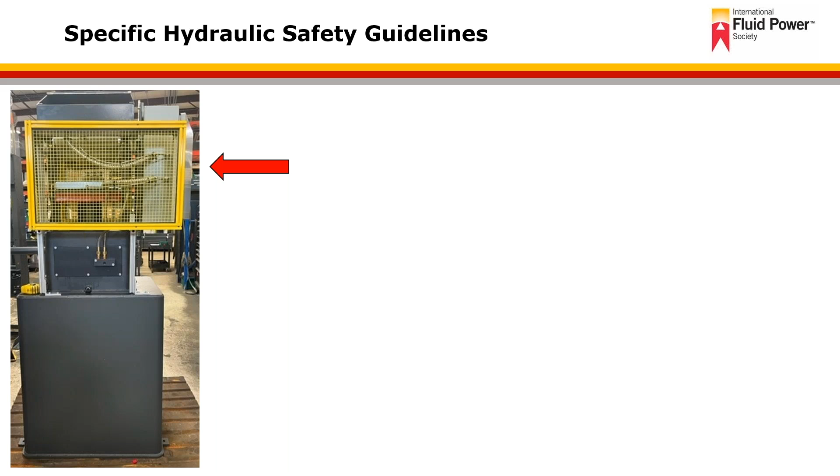These could include, but are not limited to, a foot pedal switch, which indicates that an operator has to be in position in order to operate the machine, or an operator presence switch that could be integrated into a seat. This could be on lots of pieces of mobile equipment, and you may even see a very simple form of this in an application such as a lawnmower.

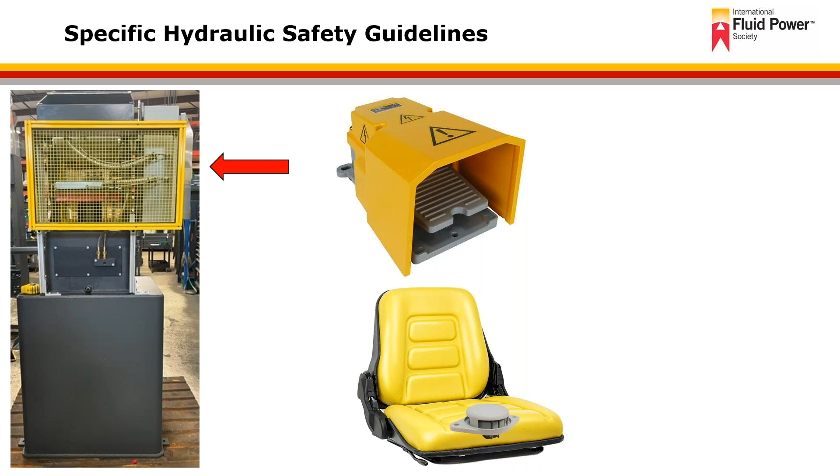This can also be a dual hand operation device, so you wouldn't want to disable one of these. The importance here is that this may be used in a press application where you have to have one hand in place on one control and the other hand used to operate a second control, which ensures that the operator has his or her hands free of any potential pinch points within a press operation.

This could also include a position switch or a pressure limit switch utilized within the system. You want to make sure that none of these safety devices intended for safe operation are overridden, as that can result in unsafe operation or potentially unintended movement of a machine or actuator. Those safety devices are in place for a purpose. You want to make sure they are not overridden, bypassed, or removed.

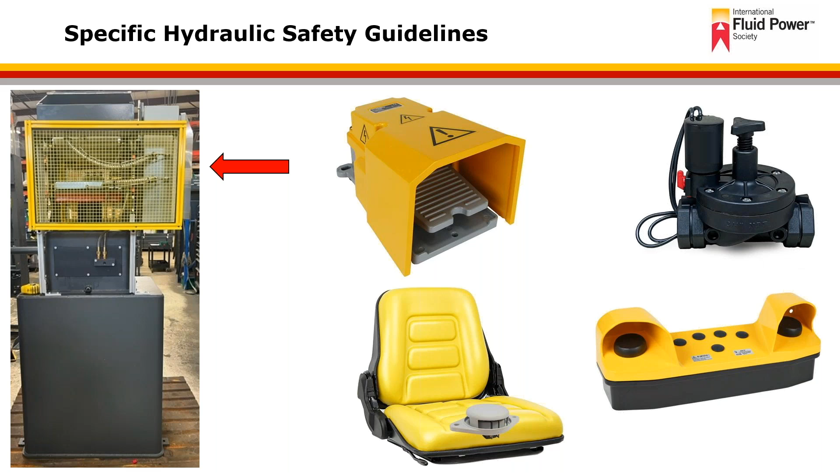Another important safety guideline with respect to startup and operation is that you should monitor gauges at startup and during operation to see if they are not reading the normal values. It's important to know what the normal values are and then compare those pressure readings during startup and operation.

You want to make sure those gauges haven't become damaged. In the case of a pressure gauge, this may be a cracked glass, a needle that's stuck in place, or one that you can't actually read. In those cases, it may be as simple as replacing that damaged or broken gauge.

In other cases, however, it may be the fact that the incorrect pressure reading is due to a malfunction within the system, and at that point corrective action may need to be taken, varying based upon the system you're working in. It's important to recognize not only what is the faulty reading, but further what's the cause, so that you can ensure you're not going to continue to ignore the situation and operate at an unsafe condition.

If you're seeing pressures higher than expected, you want to find out why those pressures are reading higher than normal and make sure that it's addressed before you continue to operate, where you may have adverse concerns and additional safety items that occur because of operating at an unsafe or overpressurized condition.

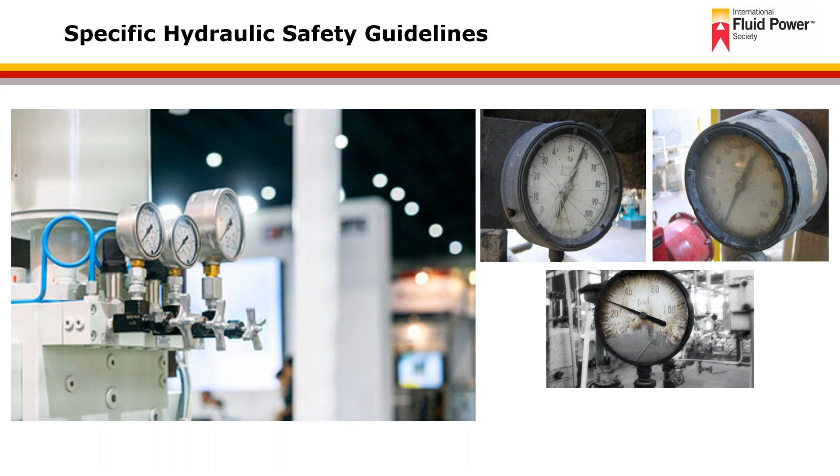Another guideline is fluid spillage. You want to clean up leakage immediately to avoid slippage or fire potential. You do not want to return any of that spillage to the reservoir.

Doing so could cause contamination to be put back into the system, which could then cause additional problems, both potentially safety problems, but then also performance problems by putting that contaminated fluid back into the system.

You want to make sure that any mopped spillage and associated materials, such as oil-soaked rags or saturated stay-dry material, are all put into the proper disposal containers. You'll need to check with the employer and with local guidelines to ensure the proper disposal procedure is followed for each of those materials.

For example, you may have a used oil container to deposit the oil that was collected or mopped up. An oil-saturated rag may have to go into a specialty container, which may be a flammable materials container, and must then be disposed of properly in accordance with both the manufacturer, employer, and local guidelines.

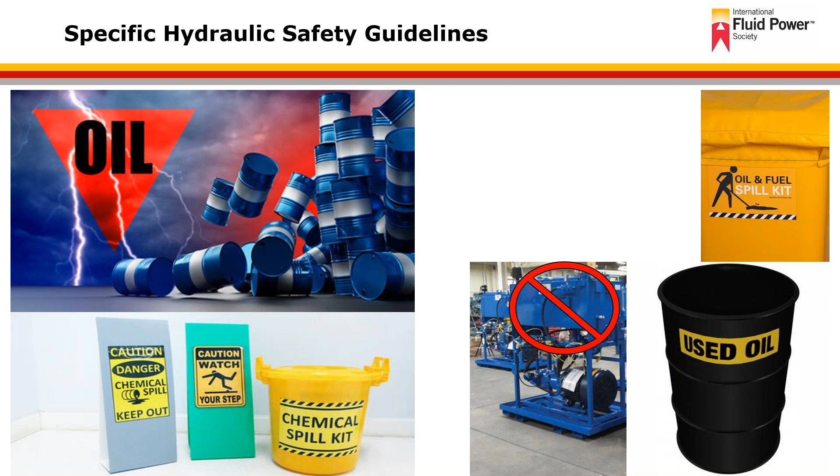In some cases, saturated stay-dry material can be disposed of in an appropriate manner. Other materials may have to be picked up by a specialty waste disposal handling company to ensure that the contaminant is not put into a landfill or other unacceptable location.

When working with fluids, it's important to recognize that fire and explosion from conveyed fluids can occur. Most fluid power media, whether traditional oil or fire-resistant hydraulic fluid, it doesn't really matter which type, all of the fluids will burn under certain conditions. Even a fire-resistant fluid can burn if it reaches a certain temperature and condition.

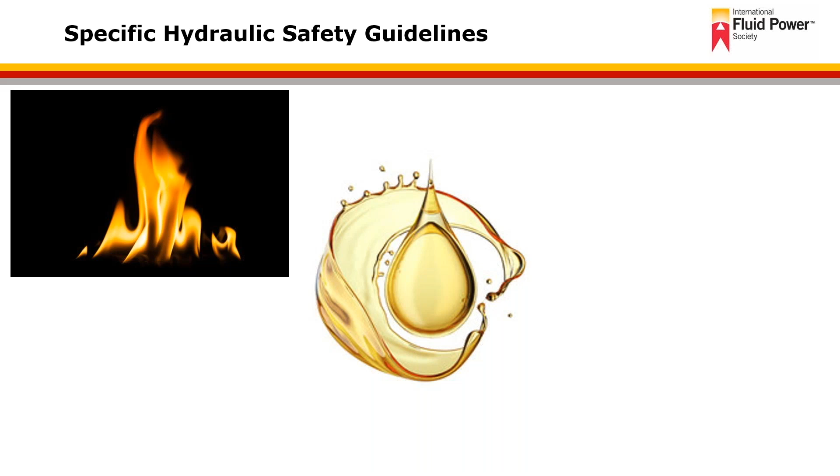As the fluid escapes, for example through a pinhole in a hose, that fluid can form a pressurized mist and fine spray out of the hose. If that is then exposed to some sort of ignition source, the fluid may flash or explode upon contact with that source. An example may be a muffler or a hot exhaust pipe.

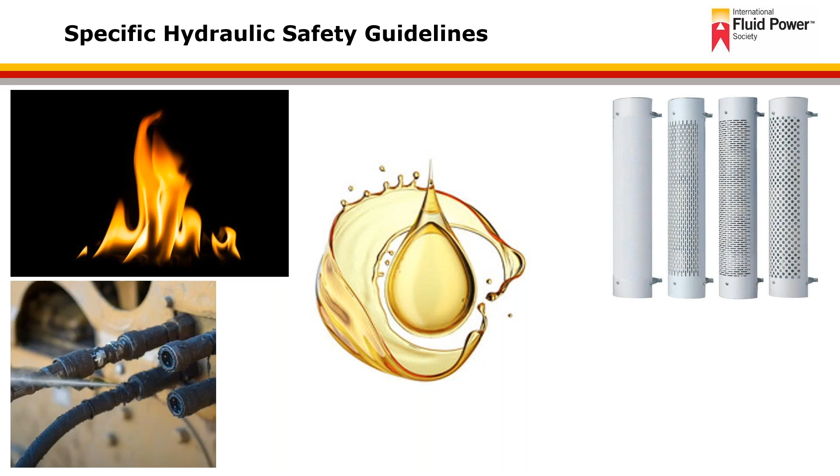It's important within design of machines to use area guards such as muffler guards or customized shielding, or specialty customized hose shields to protect the hose or tubing from exposure to hot heat sources. It's also important to route fluid conductors away from those heat sources in order to minimize the risk and potential for combustion.

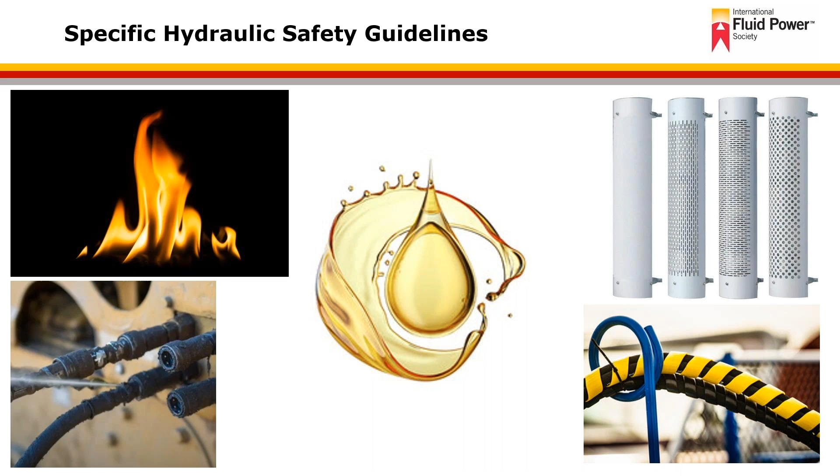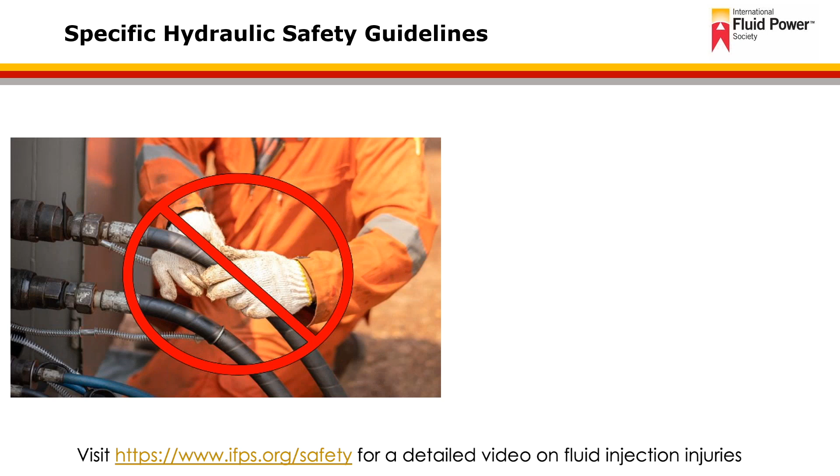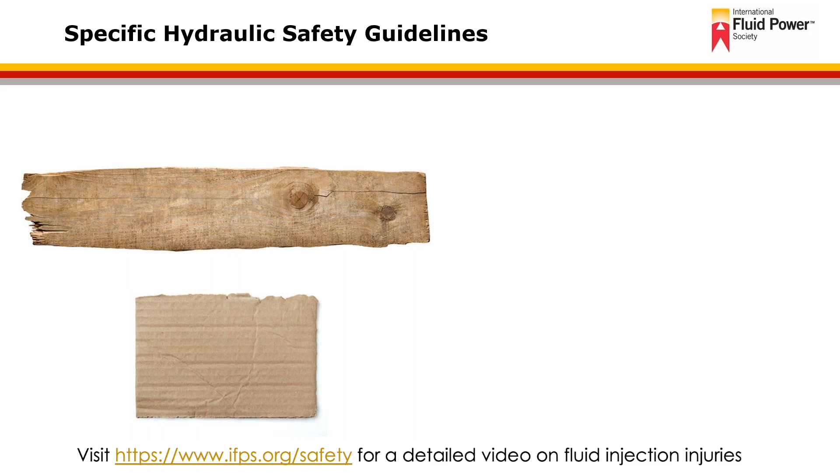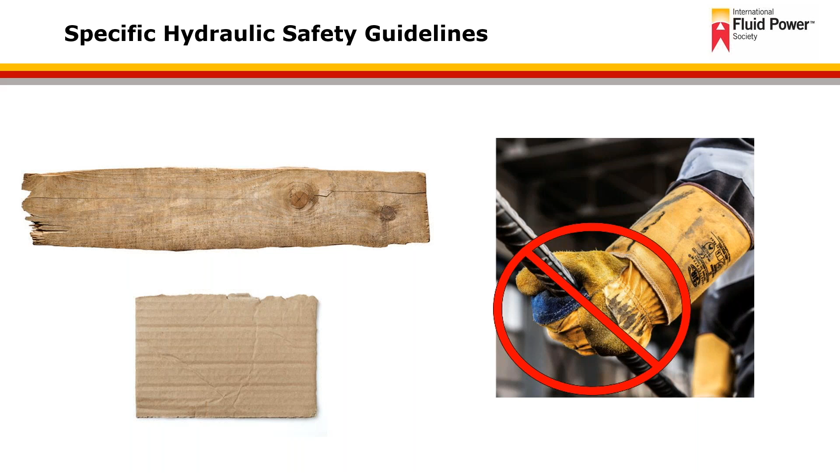It's important to never, ever use your hand to check for leaks. Always use a piece of cardboard or a piece of wood to look for those leak points. High pressure leaks can cause fluid injection injury, resulting in potential amputation or death. Gloves alone do not protect against a fluid injection injury—that injection can penetrate through various materials, through gloves that are not going to actually prevent that from being injected into your skin. So you never want to use hands when diagnosing a machine and looking for potential leaks.

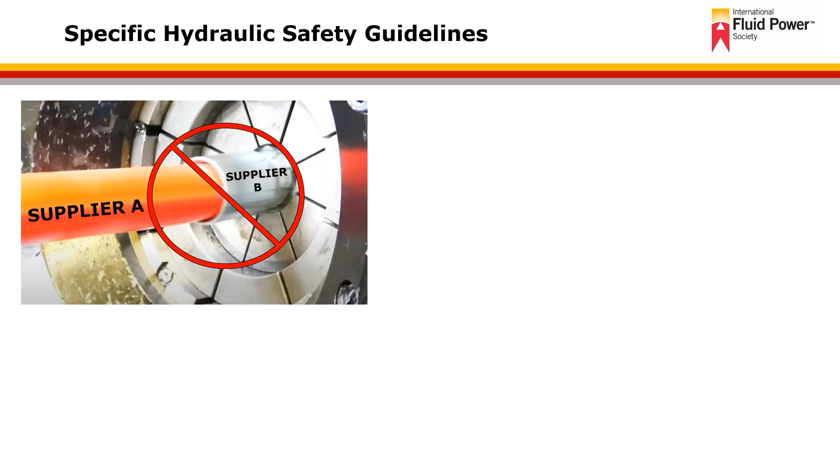The next couple guidelines relate to hose manufacturing and hose assembly. It's important to recognize that you should never construct a hose assembly using components from different manufacturers. Use only the manufacturer recommended hose fittings and their hose. Using an unauthorized combination of hose and fitting may result in a hose failure that may cause equipment damage and/or personal injury or potentially death, depending upon the severity of the situation.

Hose and terminal ends are designed by the manufacturer to be compatible and to provide the correct clamp and connection between the hose and the terminal end during the crimping process. The hose in either case has to have the proper connection with the terminal end, identified here. Even slight variations dimensionally and in the design of the ferrule or stem can cause an insufficient crimp and connection point between the terminal end and the hose, resulting in the terminal end blowing off, as both of these examples show.

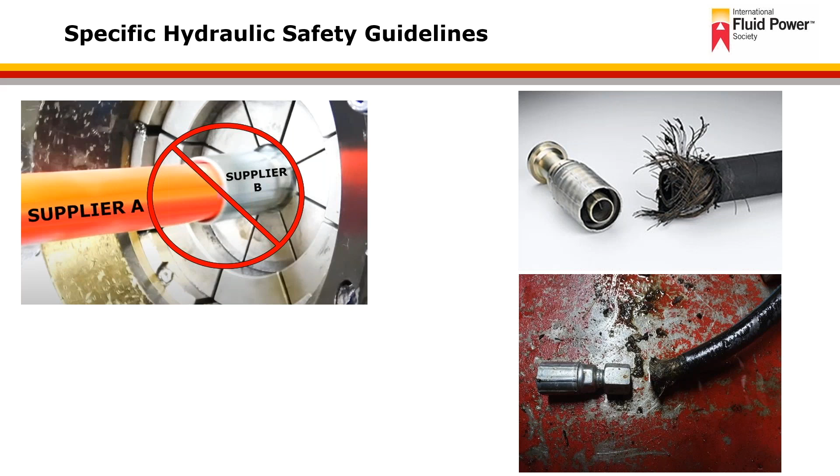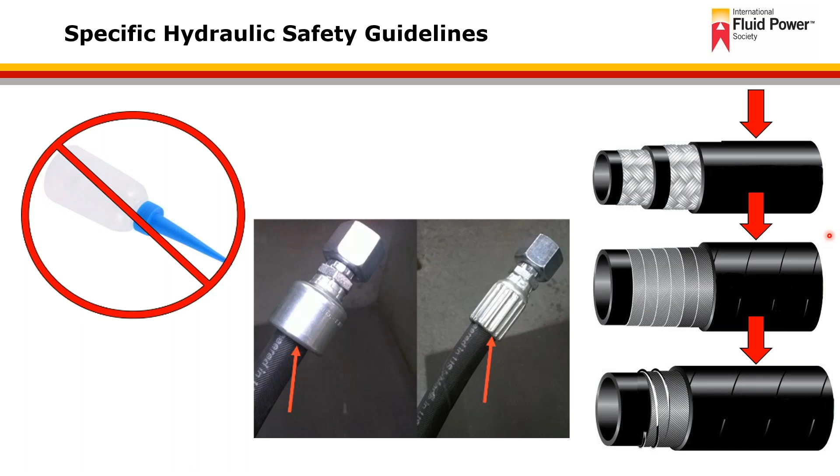During the hose assembly process, do not lubricate the hose cover—the outer layer of the hose construction. In many cases, lubrication is required on the stem to ensure it's inserted properly into the hose, but you don't want lubrication on the outside cover, located between the terminal end and the hose. At the area shown by the arrow, this left image is pre-crimp, the one on the right is after the crimp process. If you have oil at that location between the ferrule and the hose cover, that could also lead to the potential for terminal end blowoff.

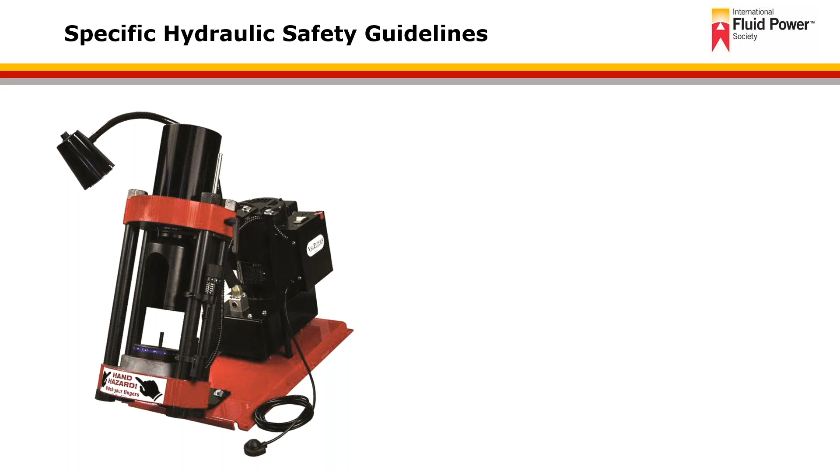During the hose crimping process, all settings are approximate. Machine tolerances exist with each crimper die set and the supporting piece of equipment used, which will affect the actual setting. Always check the crimp diameter to ensure it's within the published limits. Failure to heed these instructions can result in improperly made assemblies, again resulting in blow off of the hose or fitting at high pressure, which can also lead to the risk of fire or serious injury due to the loss of fluid.

The die sets and the crimper device are a set, designed to be used with a given manufacturer's hose. You want to make sure those are correctly selected, and that the crimp falls within the specifications to meet the requirements of the hose manufacturer.

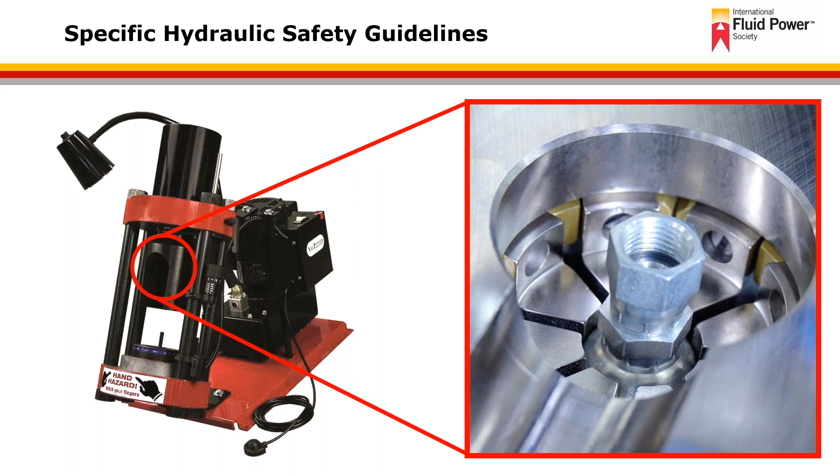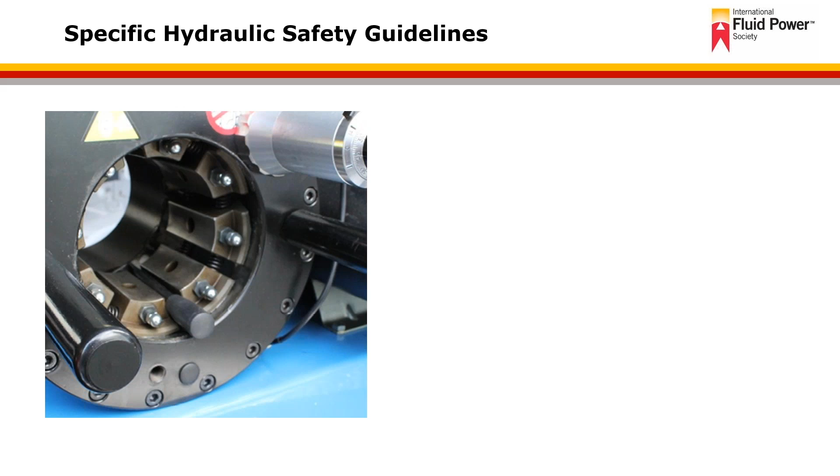Over crimping and under crimping the hose can also cause the hose assembly to fail, usually by blowing off under pressure. Always inspect the hose for the proper crimp specification following the crimp process, and ensure the measurement is within the manufacturer's specification, often given as a tolerance—a specific dimensional value plus or minus an allowable window of variation from assembly to assembly.

In the measurement process, this should be measured across the flats at the midpoint within the crimp and between the ridges formed by the crimping dies. So across the flats sections here, at the mid location between one end of the ferrule and the other, and away from the ridges, right here and here, which are created by the die sets when compressed against the stem, ferrule, and hose assembly.

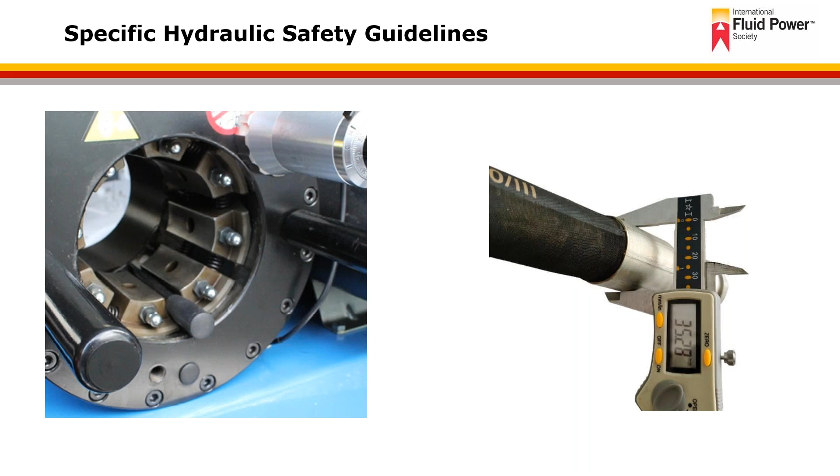Another guideline specific to hydraulic hose is to understand that the orange cover alone does not ensure that the hose is a non-conductive hose. Based on SAE standards, the SAE standard calls for the use of an orange hose as an indication for non-conductive hose type.

However, some hose manufacturers produce hose in a variety of colors, including orange. It's important then to recognize that the hose lay line must list the SAE specification and the words non-conductive in order to be used in a non-conductive application. A common application of this type of hose is in the use of an aerial lift platform or boom truck that utilizes a tool work circuit such as a cutter, a crimper, a wire puller, or a small press such as an Enerpac cylinder.

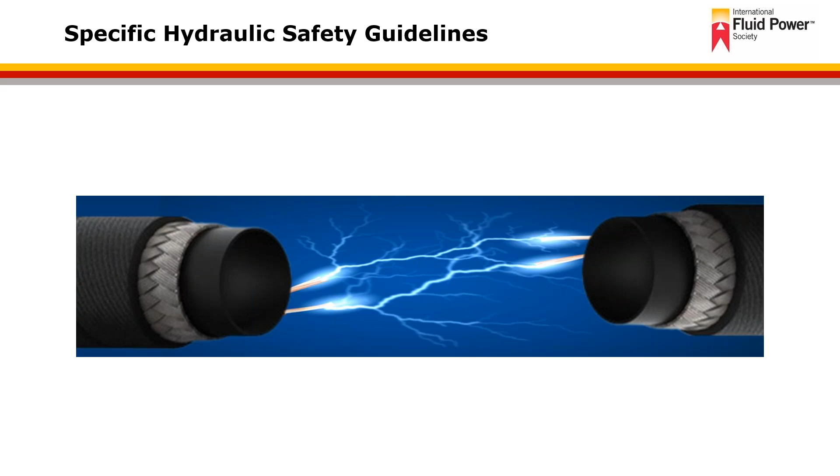The next safety guideline is related to hydraulic fluid as a whole, but it can be addressed with the proper part selection. There are many fluids that can generate static electricity, and it's important to recognize that and to contact the hose manufacturer if there's any concern about the potential for electrostatic buildup and discharge, to ensure that the hose used for the application is compatible and would prevent that static buildup from occurring.

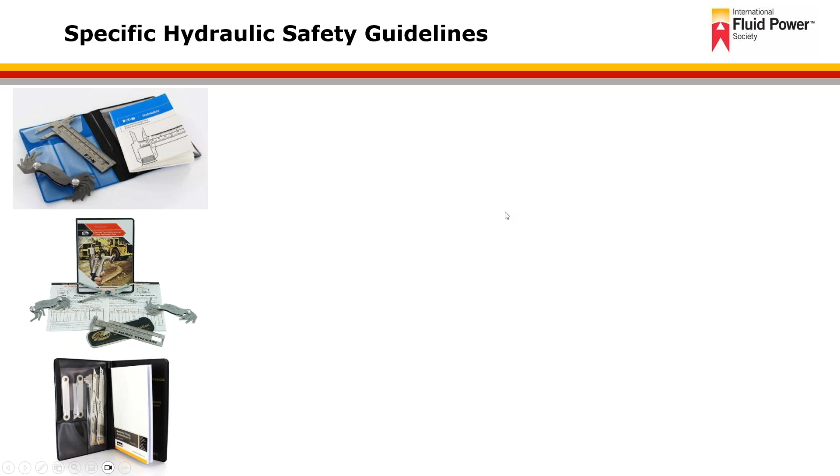It's always important to measure threads when identifying fittings, because there are so many threads that are similar in measurement and may look very similar by a general look. The proliferation of threads on the world market today makes it easy to mismatch threads, resulting in leakage and possible serious accident. It's important, when looking at a given fitting and thread type, to measure as many threads as possible to ensure a proper and accurate measurement, and to check the standards and the various fitting tables for the specific size and specification to ensure you're identifying it properly.

Some thread types have similar thread pitches and diameters across different types. Proper determination or identification comes from recognizing the fitting type, such as a flare fitting like the one shown, or recognizing the potential presence of a seal within the fitting, such as a face seal or an O-ring face style fitting. In the case of the flare fitting shown, the flare angle must also be measured for proper identification.

In order to use the various kits shown, either from Eaton, Gates, Parker, or any of the fitting manufacturers, those thread identification kits are used to identify and make sure that you don't have an incorrect fitting for the application, and make sure that you don't have a set of mismatched threads that would result in a leak.

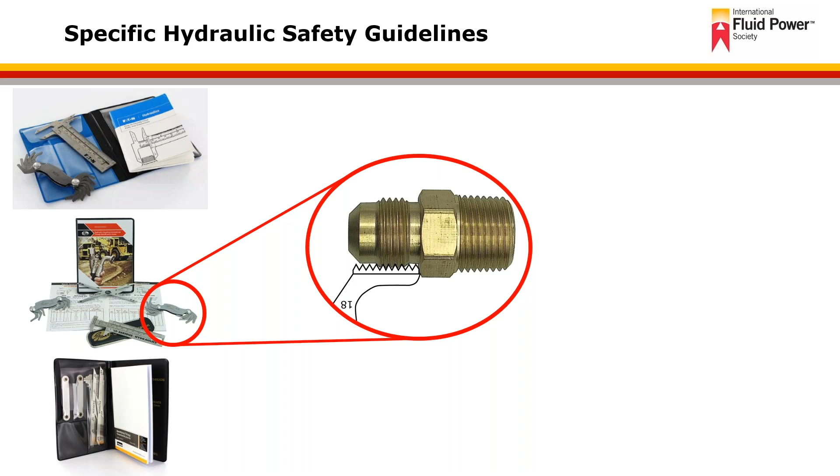There's a basic 3-step process to identify those threads. The first step is to measure that thread pitch. The second is to measure the diameter of the threads. And the third is to measure the seating angle where applicable. Again, because of the similarity in thread types, measuring as many threads as possible gives the most accurate reading to ensure you have it properly identified.

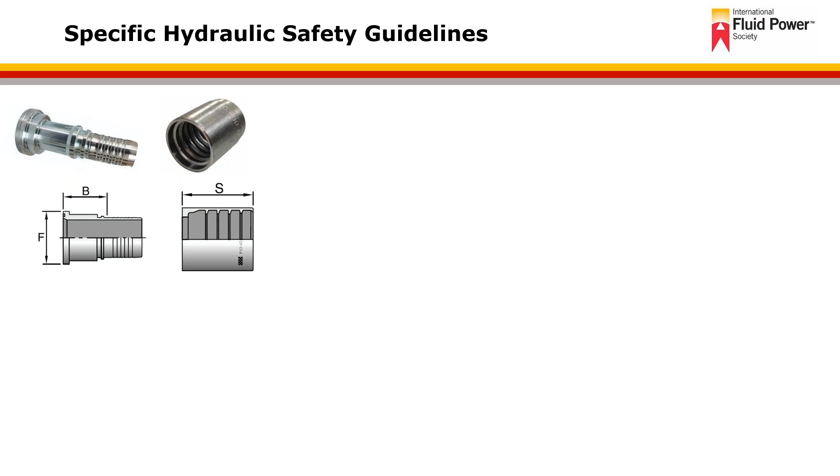The next safety guideline also relates to properly identifying fittings. However, in this case, we're going to be looking at the terminal ends for a hose assembly. Each manufacturer has its own ferrule and stem markings to match the different types of hose. This marking system can be part of a part number stamped on the product or a set of notches or lines on the part. For this reason, it's recommended to consult the manufacturer for details if you have any questions on properly identifying those fittings.

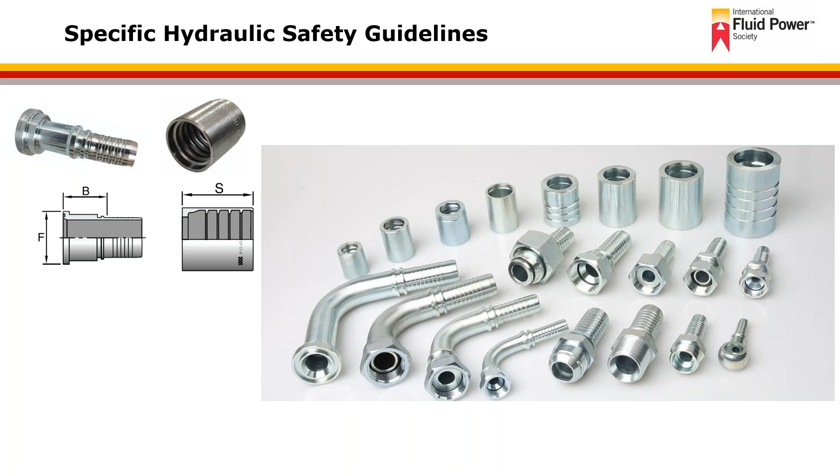With the ones shown, you can see that some may have a part number stamped on the actual ferrule to be aligned with the part number stamped on the stem, or it may be an identification such as the machined rings shown here, one on the right with 4, versus one with 3, another with 1. The idea is that those identifying features are specific to manufacturers to ensure that the proper terminal end parts, in this case the stem fitting and the ferrule, are properly mated and matched with the given type of hose you're assembling.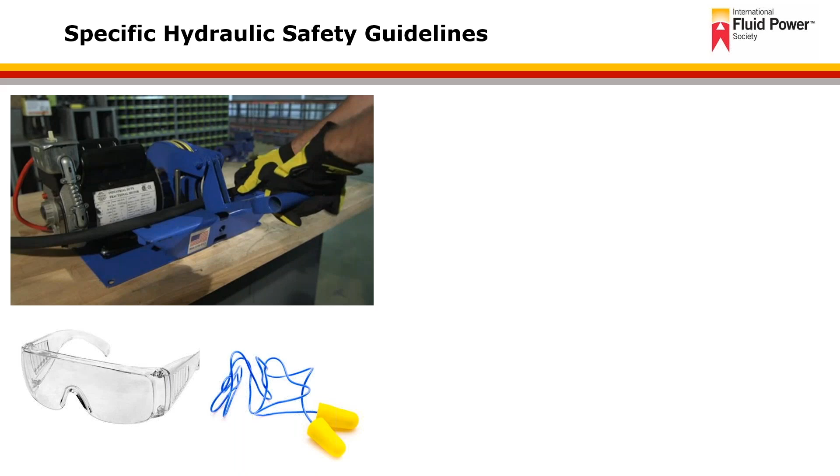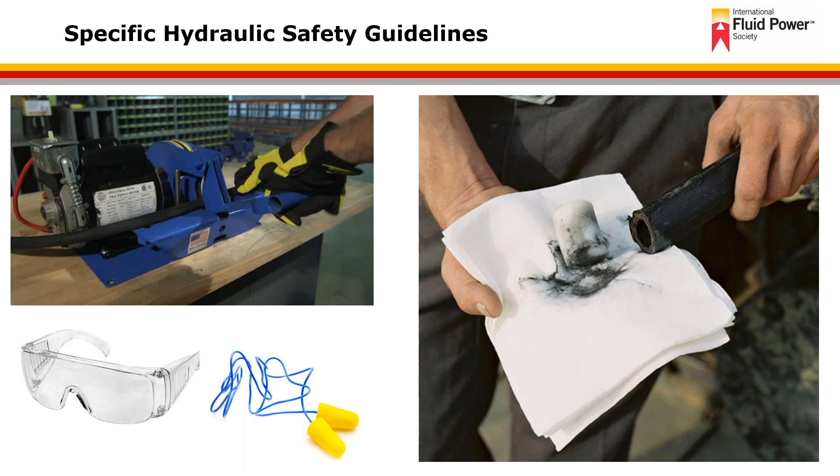The cutting of any hose will generate some debris that, if not properly removed, can damage the hydraulic system. Many times, the cause of early system component failure is the result of debris left in the hose during the cutting and assembly process. What is shown here in the photograph on the right is the use of one of the cleaning plugs that are projected through the hose to clean any of that debris out prior to completing the crimping process.

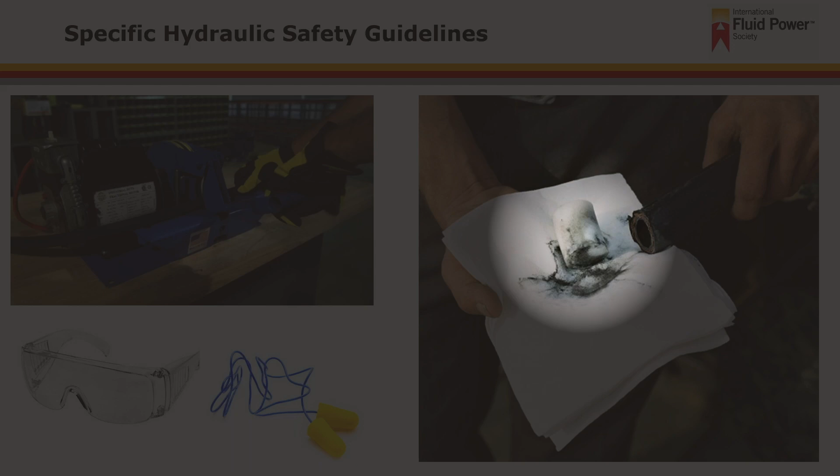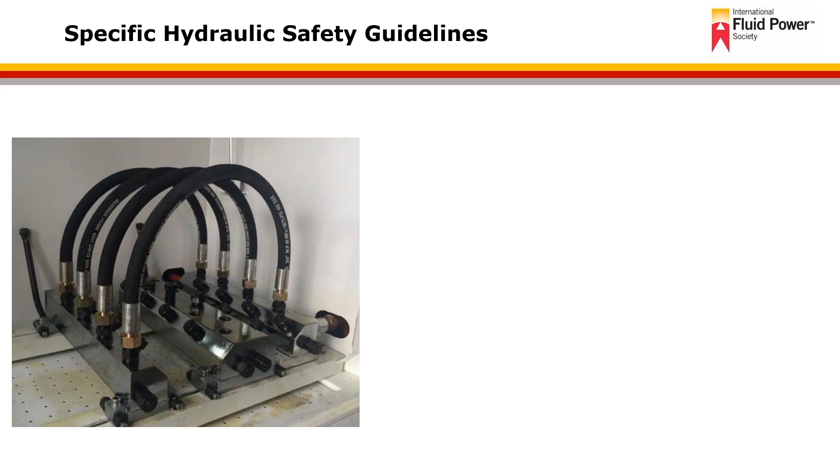The next safety guideline is specific to hose testing. Water or another liquid suitable for the hose under test shall be used as the test medium. The use of air or other gaseous materials as testing media should be avoided because of the risk to the operators. In special cases where such media is required for the test, strict safety measures are imperative.

Furthermore, when a liquid is used as the test medium, it's essential that all of the air is expelled from the test piece because of the risk of injury to the operator due to sudden expansion of the trapped air that would be released when a hose bursts or a fitting is opened.

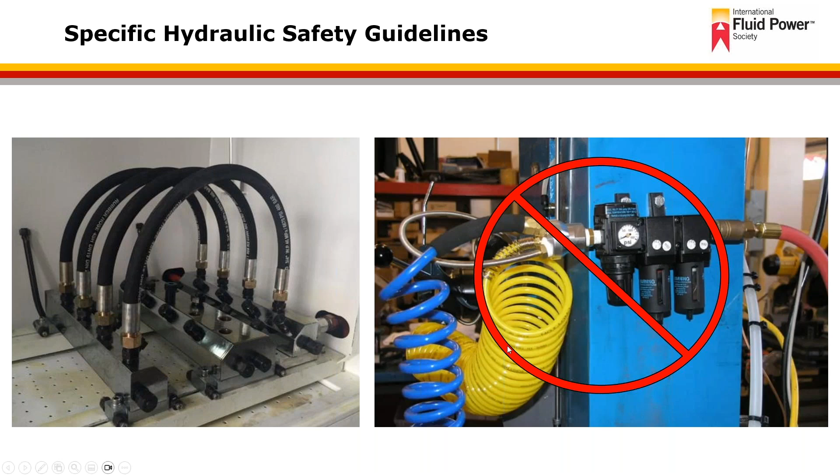So in this case, what's shown on the left is a hose burst test. Integrated into this often is a method to be able to bleed the system of air prior to conducting the test. Air is compressible, and therefore when it's released, you can have a sudden release of energy, which can cause a potential safety issue and potential injury.

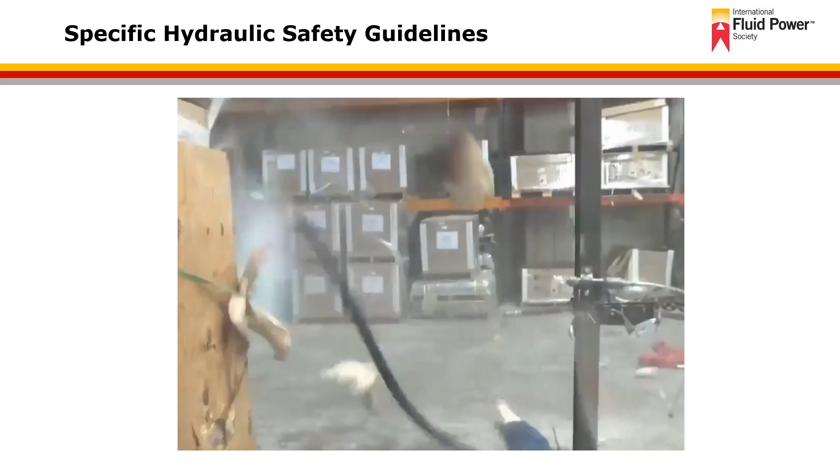Whipping hose: if a pressurized hose or tube assembly blows apart, the fittings can be thrown off at high speed, and the loose hose can then flail or whip with significant force. Where the risk exists, consider using guards or hose restraints to protect against injury.

You do not want to temporarily drape a return line hose into a reservoir. Even within a return line, hose whip can occur depending upon the flow rate and the velocity of the fluid returning to the reservoir.

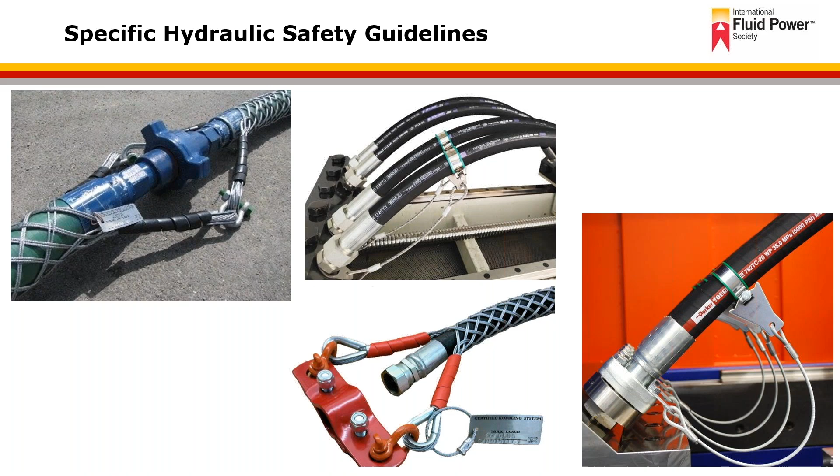Here are shown several examples of hose whip restraints so that in the event of a hose failure, this can be prevented from whipping back and forth during that sudden loss or rupture of the hose.

Caution must be exercised when isolating or trapping fluid in a cylinder, hose, or circuit, such as in the case of a tractor implement with quick disconnects. While disconnecting the quick disconnects does lock up the cylinder or isolate the circuit, it subjects the actuator and any connecting lines, hose, or tube to possibly be dangerously overpressurized due to thermal expansion.

Thermal expansion may increase pressure by about 1.12 megapascals per 1 degree Celsius of temperature increase, or 90 psi per 1 degree Fahrenheit increase. To put this in perspective, on a typical spring day here in Pennsylvania, it's not uncommon to see a daily temperature swing of upwards of 35 degrees Fahrenheit. If you have a 35 degree Fahrenheit temperature increase in the day, that can increase your pressure by 3,150 psi.

So if you have a system and you shut it down with 1,000 psi trapped within the system, and then have a 35 degree increase in temperature during the day, that 1,000 psi can now increase to 4,150 psi. That just gives an idea of the magnitude.

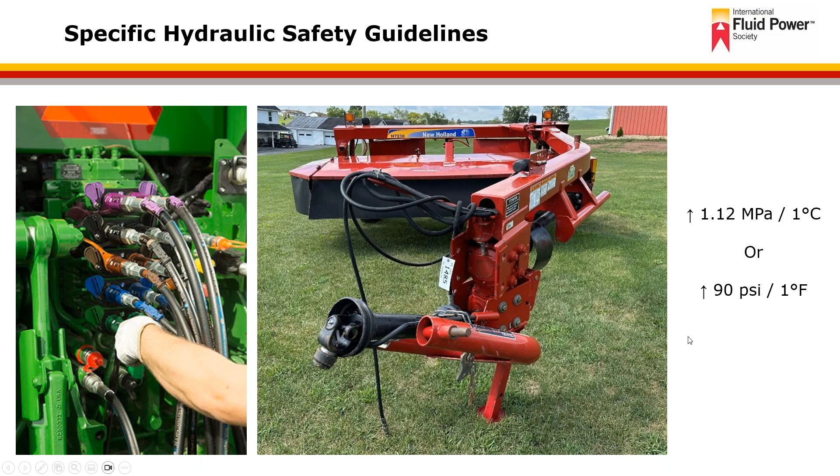When testing cylinders, it's important to follow lockout, tagout procedures. Ensure that any suspended load is mechanically locked or lowered to a safe, non-pressurized position before making any adjustments to load holding valves or loosening any fittings.

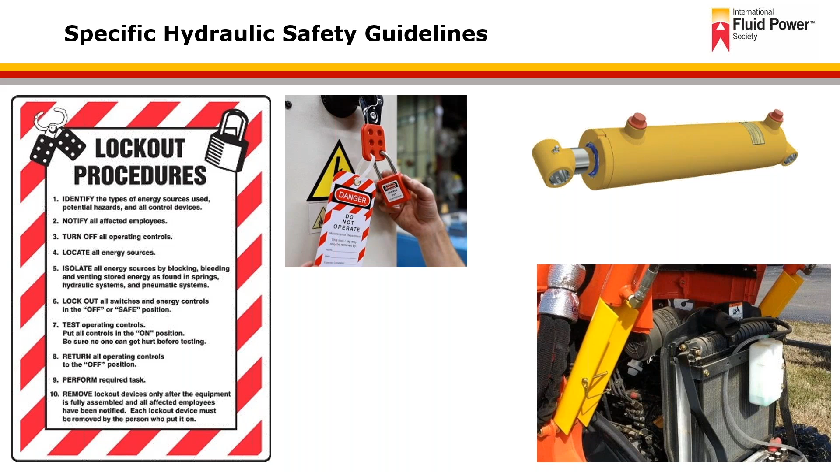Shown are examples of typical lockout devices. This first one is a dump box prop that can be put in place of a utility dump bed to allow for that cylinder to be removed and serviced. Or you could have, in this case, a cylinder prop stand that's put in place to lock the cylinder in position to be able to perform service on the machine and prevent that cylinder from drifting down.

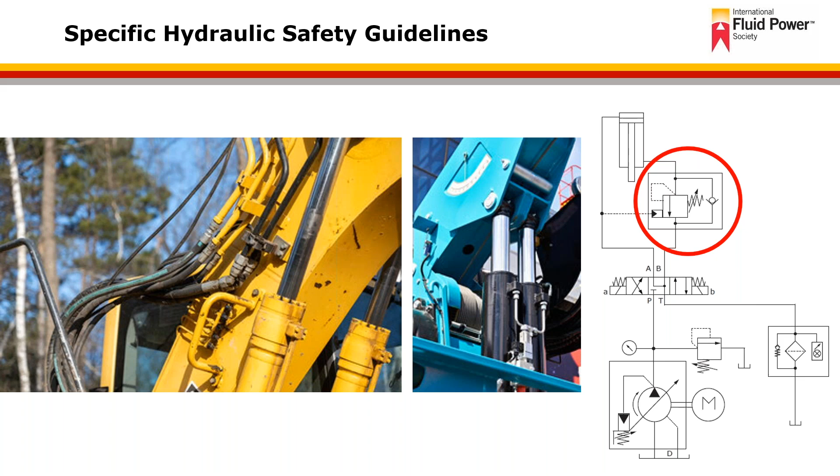When removing one cylinder from a function that uses two cylinders, again, it's important to support the load. Do not rely on the other cylinder to support the load. The load must be removed from both cylinders and mechanical locks put in place to prevent movement, similar to the ones that we showed a few slides ago.

Dual cylinders are common in large mobile equipment, and shown are just some examples of different systems that utilize two cylinders to lift the load.